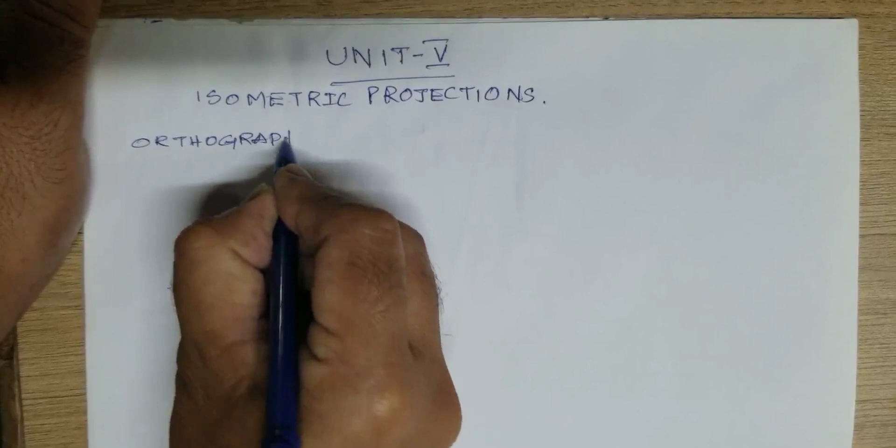But when you are drawing in orthographic way, I would like to explain orthographic. Let us say I am drawing that cube in orthographic way. Just see what this is. So when you are seeing this cube from the front, how are we going to draw it? We have some idea about orthographic projections. First of all, we have to draw the XY line. Then the front view you have to draw. When you are seeing from the front, how is it visible? As a square. This is a square that is visible.

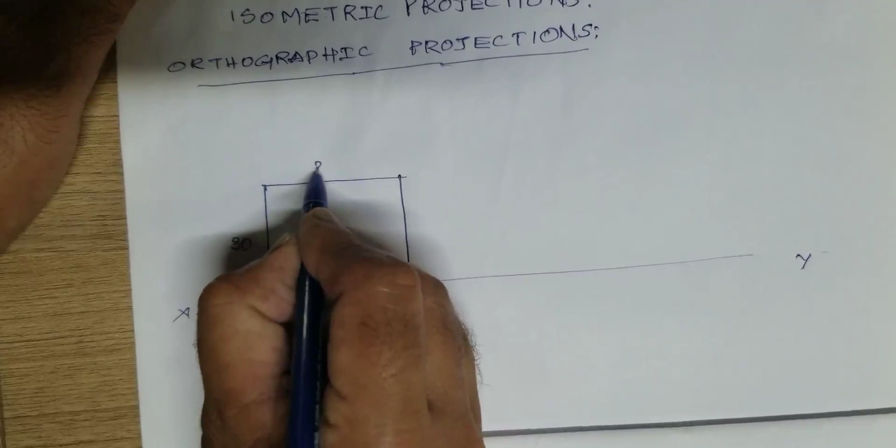So whatever the dimension may be, I am saying a small cube, let us say 30 mm dimension, here also 30, here also 30, here also 30, like that. That is when you are seeing from the front. Let us say we are seeing from the top, how it is visible. When you are seeing from top, it is visible as once again one more square here. This is the front view, this is called the top view. But what about the side view?

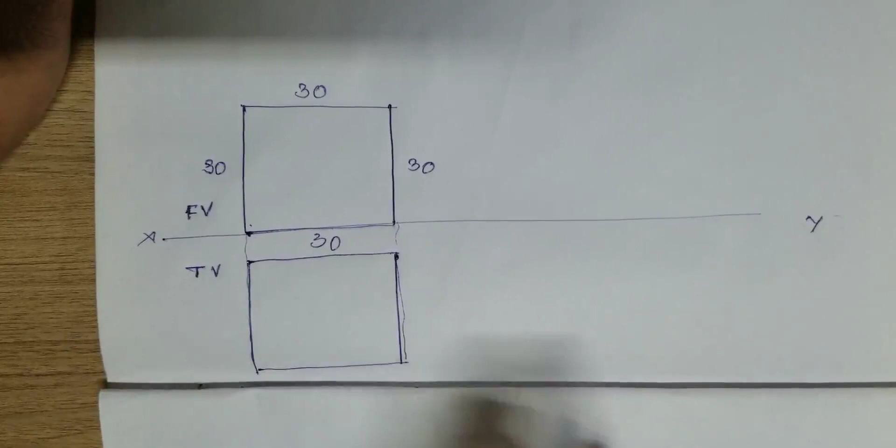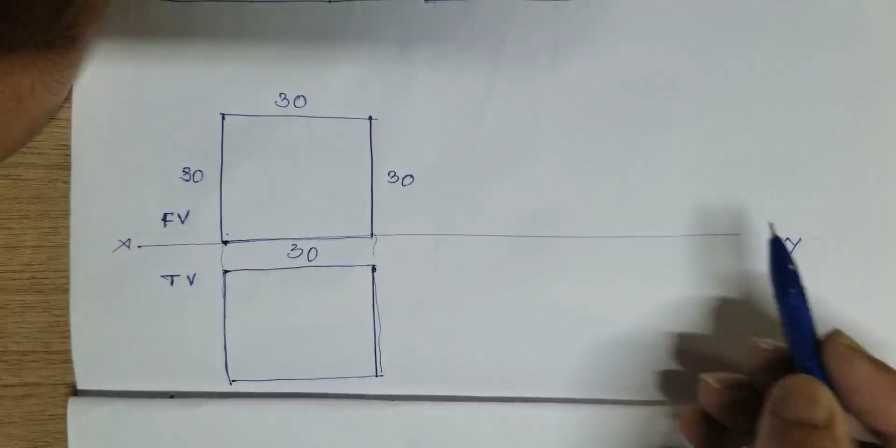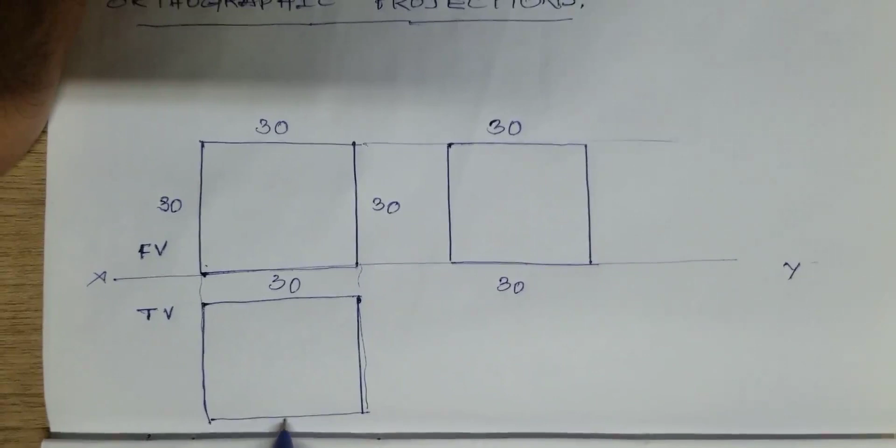Side view, either we can use left hand side or right hand side. No problem, we can use both sometimes. At least one we can draw, because the cube is symmetrical on either side, left side and right side. I am taking left side, so we have to draw it to the right side of the front view. So this is once again one more square of the same dimension, 30, because cube means all 6 sides are equal. It is also 30, 30, and here also 30, 30. Right? This is front view, top view, and side view.

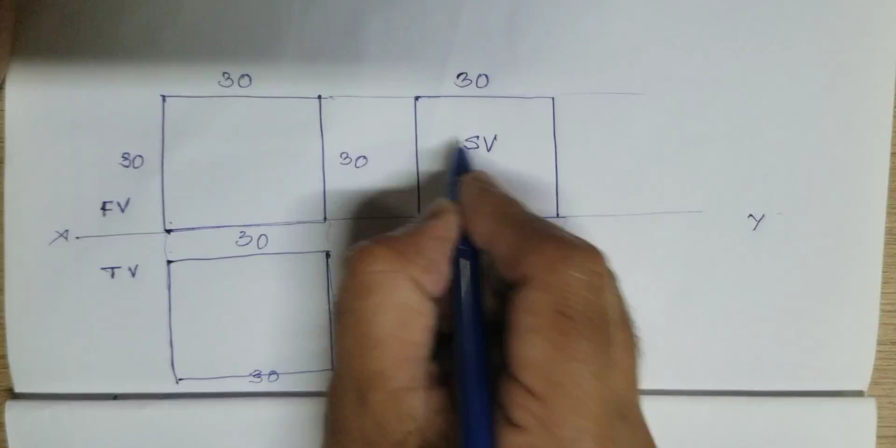Here we are saying it is left hand side view. If you wanted to draw the right hand side view, we have to draw it on the left side of this front view. So no problem. This is how we are going to do it. This is the cube actually. You can understand a little bit by seeing this front view, top view, side view, that it seems to be a cube.

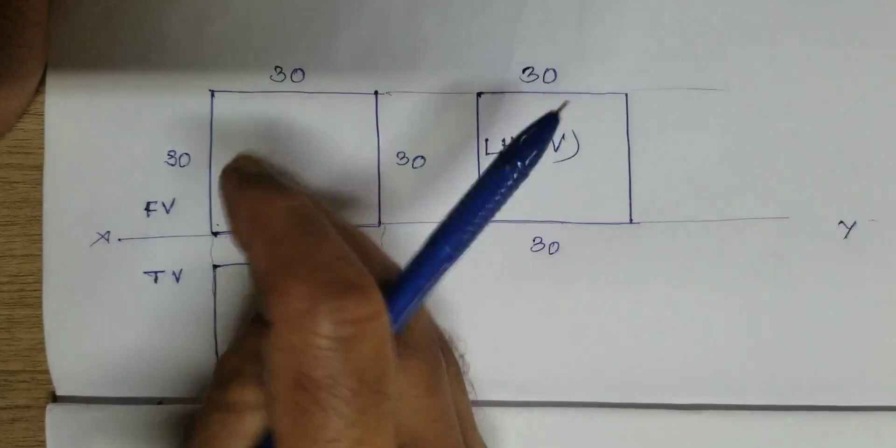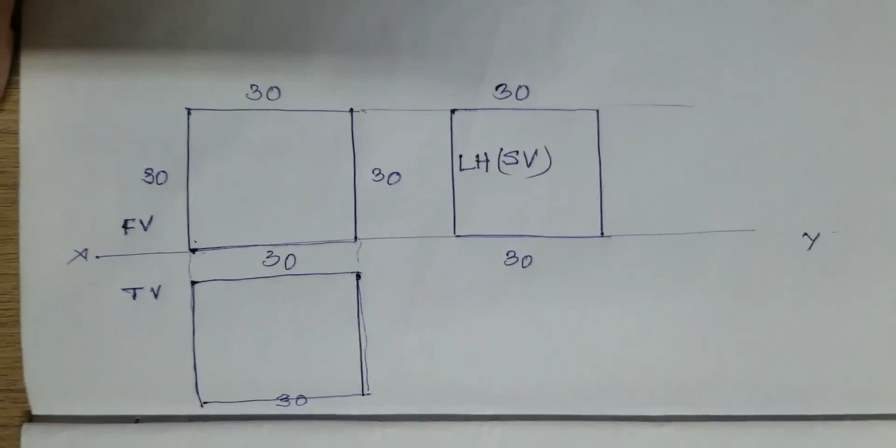Let us say some kind of rectangular object, cuboid, or cones, some other different kind of solids. Can you imagine that it is a cube? We can't. Only when we are having some kind of drawing knowledge can we say it is a cube. Otherwise, we are unable to say it is a cube. So the other way of projection, what we are discussing, is isometric projection. This is orthographic projection. That's why we are learning isometric projection.

This one, how do we have to do it? We have to do it like you see here. I am writing here isometric cube. It is the XY line. So one side we have to take on a 30-degree line.

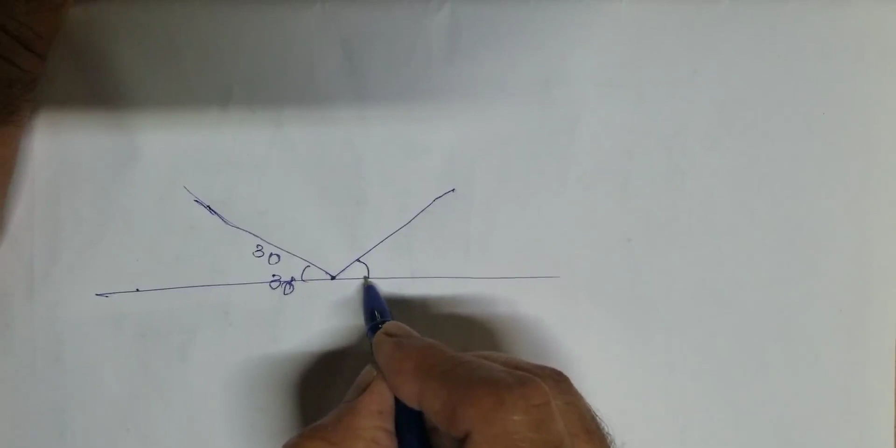The other side we have to take on a 30-degree line. So here we are going to have 30 on the 30-degree line, because one side we are taking on a 30-degree line and the other side we are taking on a 30-degree line, and this length is also 30. So the vertical we have to take like this. See, we are getting 3 directions. Let us say we can write O to X direction, then O to Y direction, O to Z direction. So with 3 axes we can try to draw the cube.

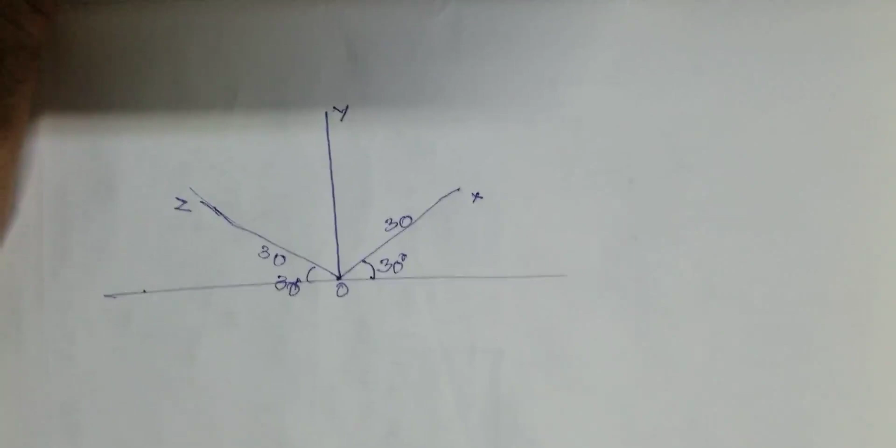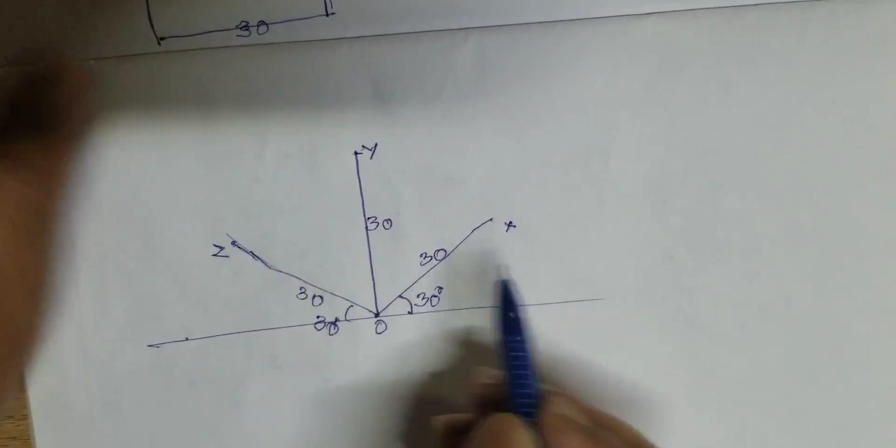See here, we are going to draw it, it is 30, vertical. The same 30 which is parallel to this line, from this point we have to draw it by keeping your mini drafter here and draw here, like this. What is this length? Same thing, whatever the 30 is there, take the same 30 here. So it is 30. Here also take the extension line for this, parallel to this line. Keep your mini drafter here and keep it over here. Draw the line. This length is also 30, like this.

Now draw the parallel line for this line. Keep your mini drafter here. Keep it over here. Draw the line which is parallel to this. So it is also 30, because we are getting the same length. Here also draw the parallel line for this line. From here, draw the line.

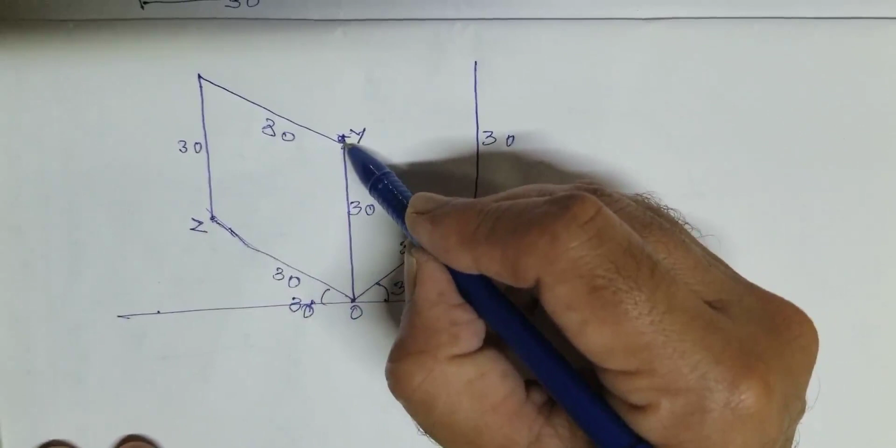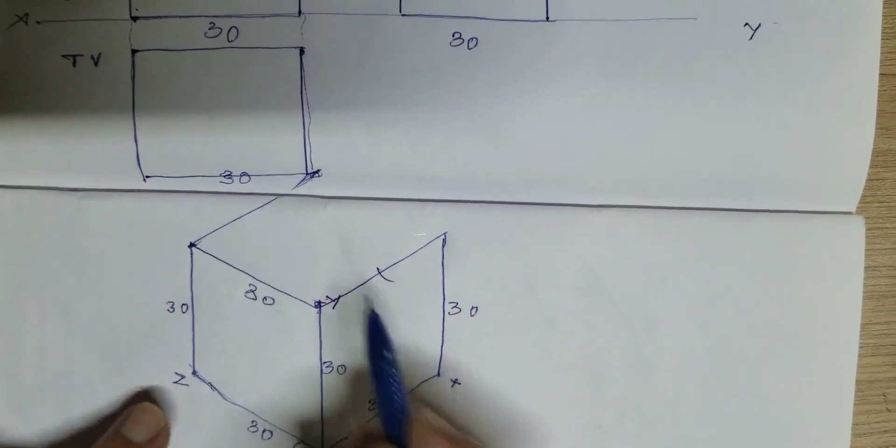Right? Now, from here, draw the parallel line for this line. Keep your mini drafter here. Keep it over here. Like this, it is coming over here. Draw the line. This length is also equivalent to this length. No problem, it is 30 only we are getting. From here, we know this point and this point. Draw these lines.

So, you just see this object. Once again, I am making it dark. This is looking like a cube. All 6 sides are equal. So we know this is one side, second side, right? Third side, which will be the back side here. Actually, this is the back side we are getting. Fourth side, then fifth and the bottom sixth side. So when you are representing it like this, we can understand it is a cube.

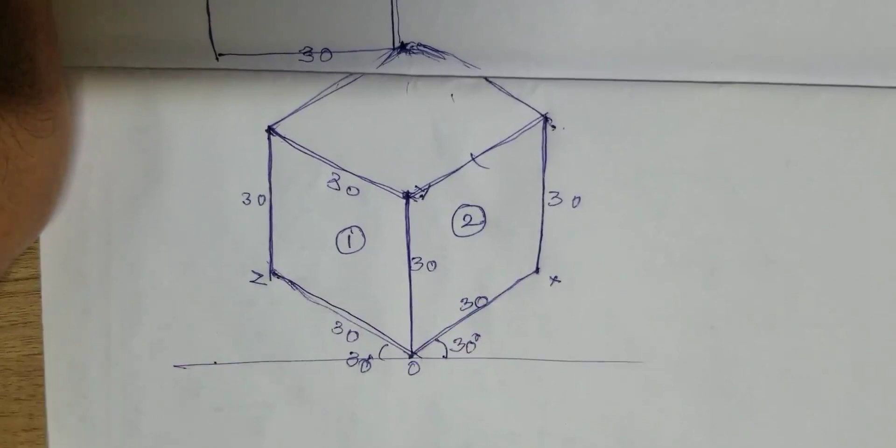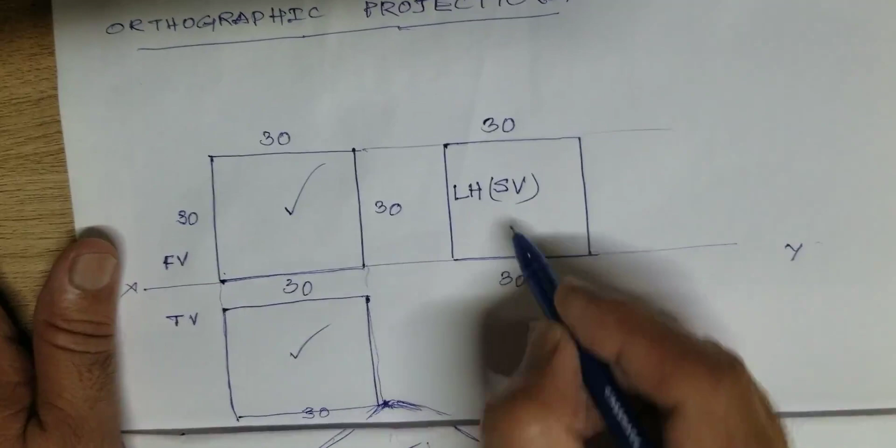Let us say we are seeing from this side. I am drawing the arrow. That means we are focusing from this side. So this square is visible like this. This top view is visible like this. This side view is visible like this. This kind of projection is called orthographic projection.

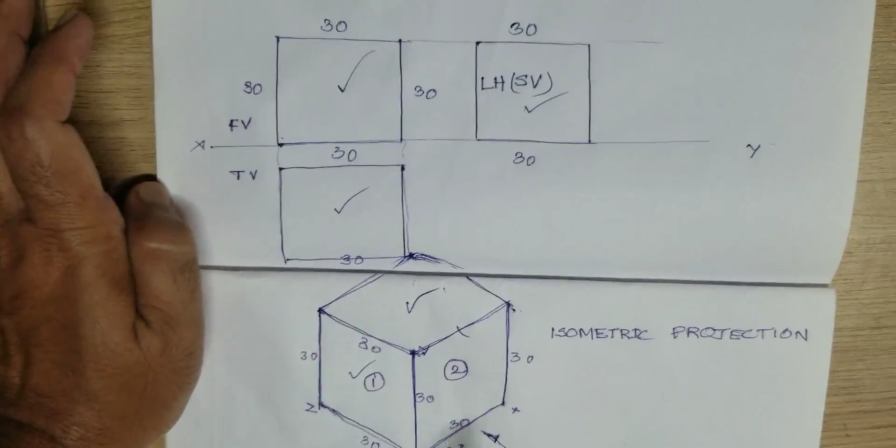See, the advantage of isometric projection is the cube is represented like this. The same cube is also represented like this. You just see, an ordinary person is also able to understand this is a cube. But this they are unable to understand, because unless they have drawing knowledge, they are unable to identify it is a cube. But here they can identify it. That's why it makes the difference as compared to this. So how do we have to draw it? Why do we have to take it like this? I would like to explain a little bit further.

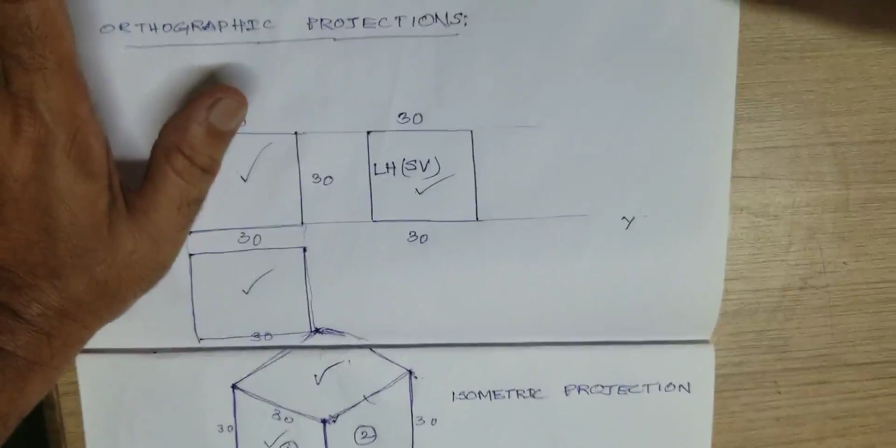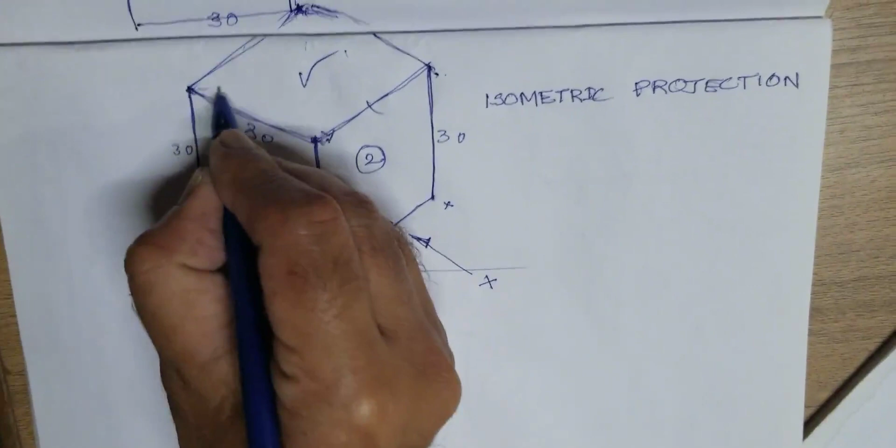So here what I would like to say is, if you are seeing the cube, see here, this is 30 degrees, no? Actually see what the angle between two lines is here. This is the line, this is one more line. The angle here is 90 degrees. The angle between this plane and this plane is also 90 degrees. Just come over here. The angle between these two is 90 degrees, but it is not 90 degrees here when we are drawing in isometric projection.

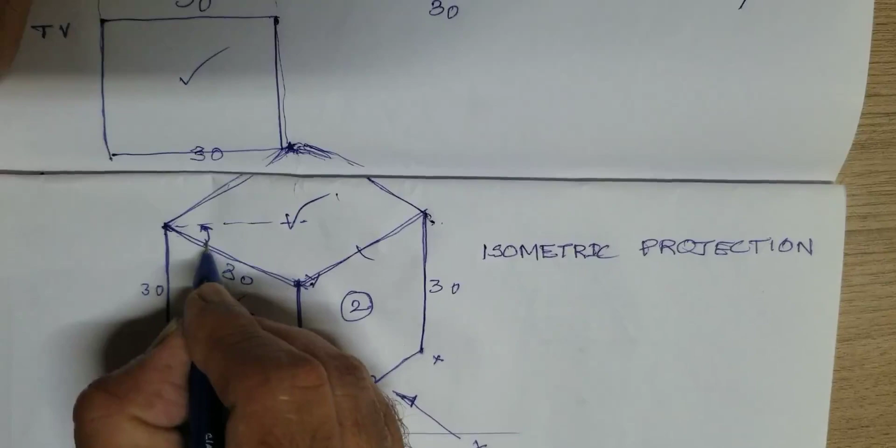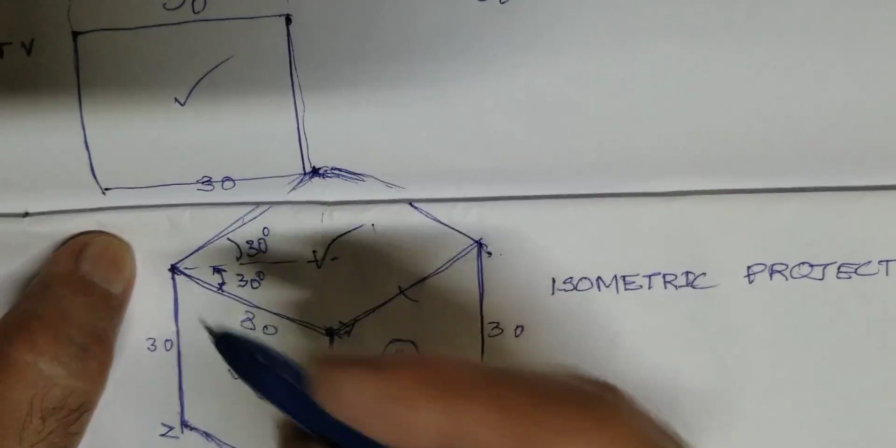Here, how much are we drawing? As we are taking 30 degrees, we are drawing all parallel lines. We are getting a 30-degree line over here. This is also 30. But what should it be? Here we are getting only 60 degrees, but we are missing 90 degrees. I am doing a small analysis of that 90. See here, this half line is 45 degrees. When the entire angle is 90 degrees, the half itself is 45.

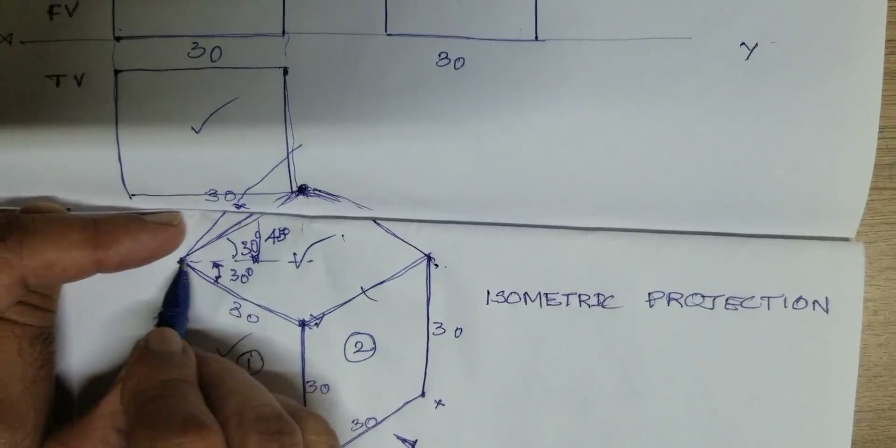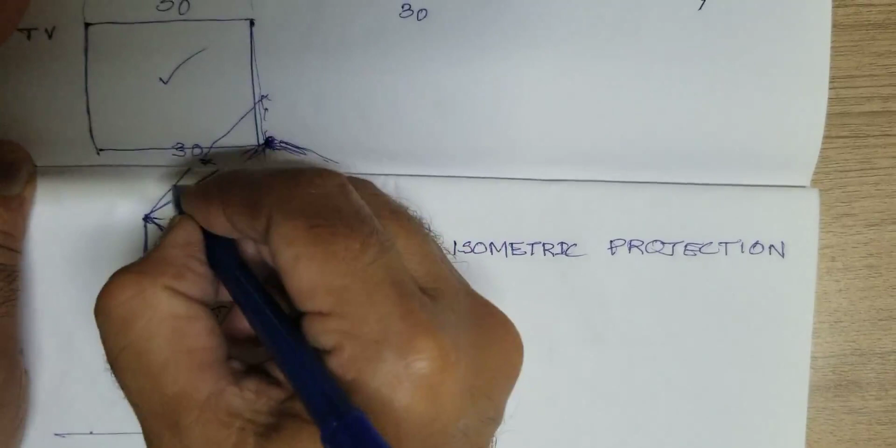So I am drawing a little extension like this. See here, this line I am drawing here. This angle, how much is it? Tell me. 45, because I am taking the true angle. Here also we can take 45 degrees. Here also it is 45 degrees. I am extending the line like this till the middle point. Just understand this. This is the 45-degree line. Actually we can say it is the true line, true length, or otherwise it is called isometric length.

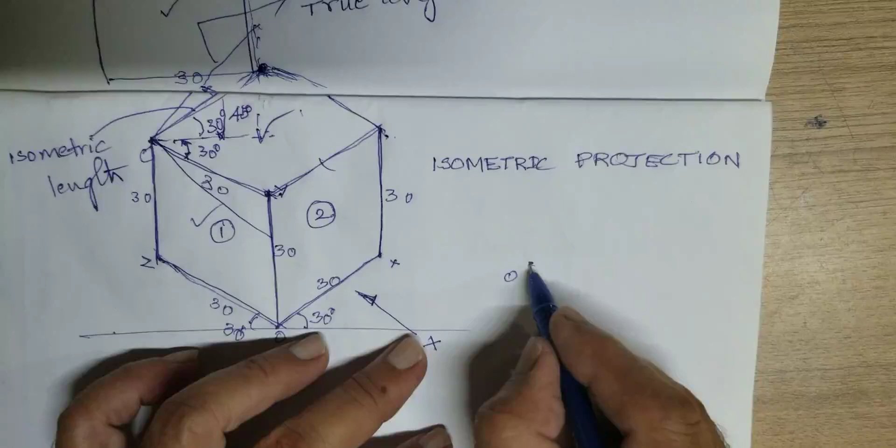Now I am magnifying this entire diagram aside. See here, this horizontal line I am writing here. Let us say it is O point. This is O I am writing. Forget about the distance. Now I am writing the 30-degree line. This 30-degree line I am writing.

How much distance we have to take? 30 mm we are taking, for example. Then we are taking one more line which is the real or true line, making a 45-degree line like this. This is the 45-degree line. All this I am doing to make some kind of analysis.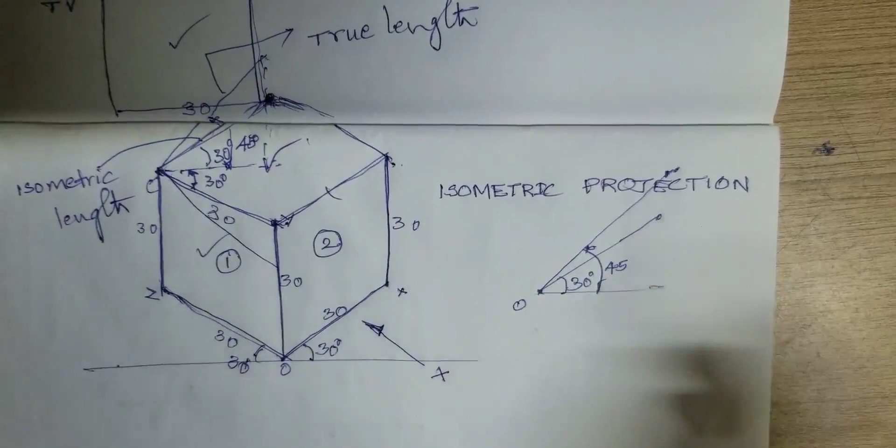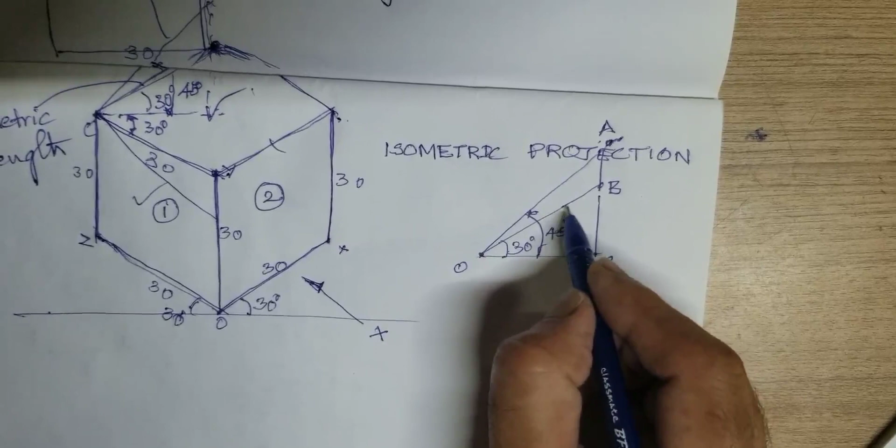See here. Now I am drawing the line as I am showing here. This point I am marking as A, this point as B, this point as C. I would like to make an analysis on this. What analysis? We know it is isometric length. Iso length I am writing. It is a true length.

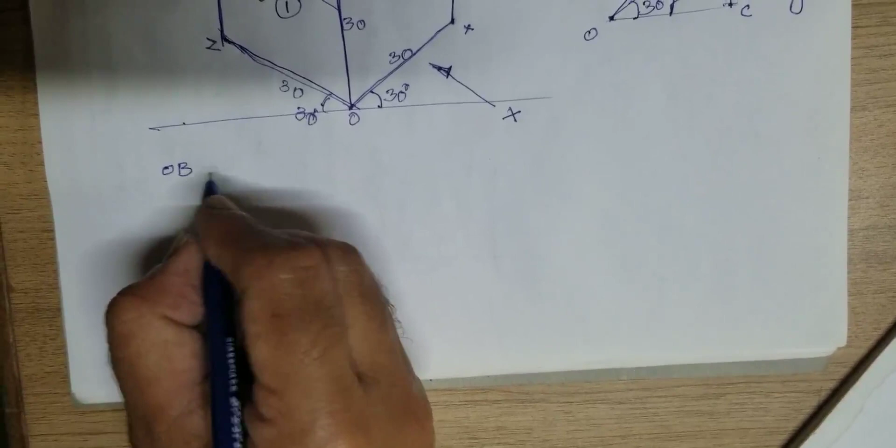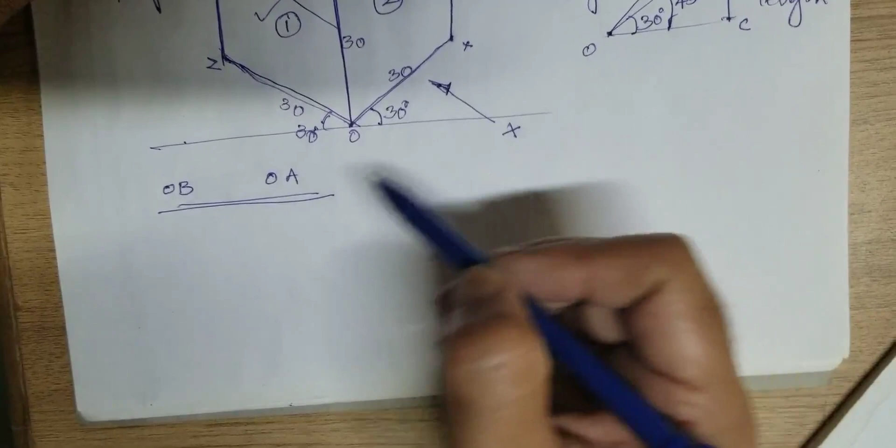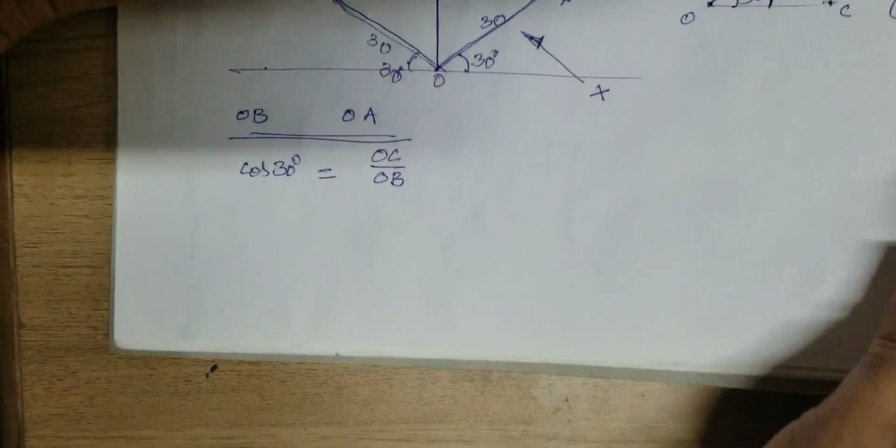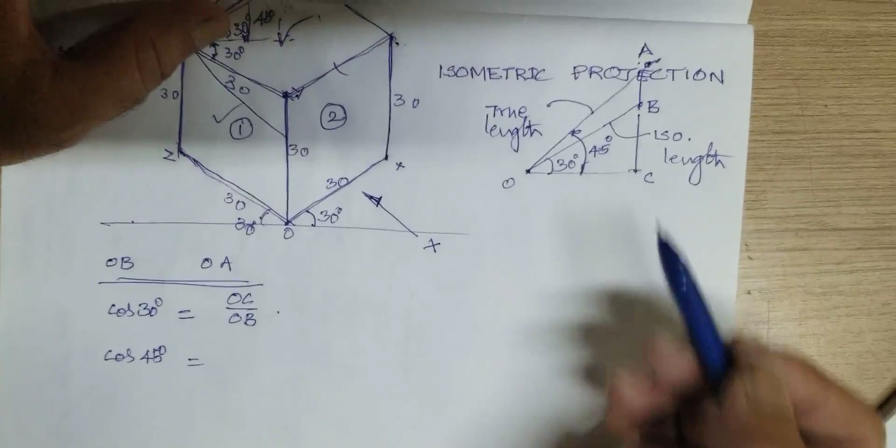So here I am taking cos 30. What is cos 30? In the right angle triangle OCB, cos 30 is equivalent to OC by OB. Then you can take cos 45 here. What is cos 45 in the bigger triangle OCA? OC by OA.

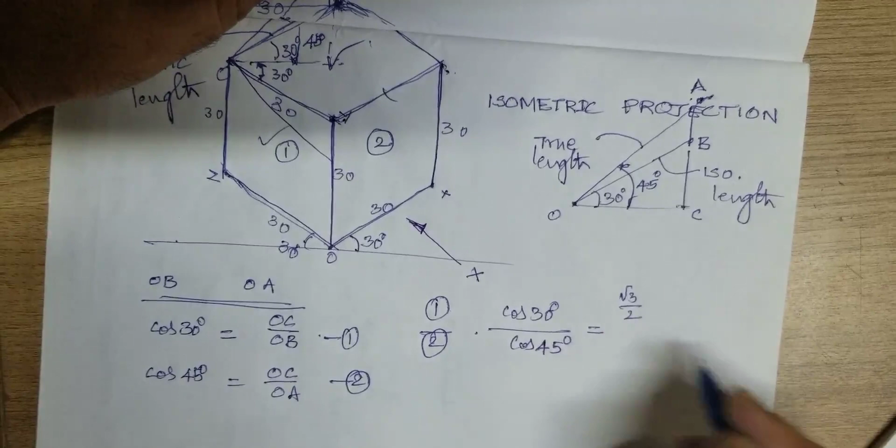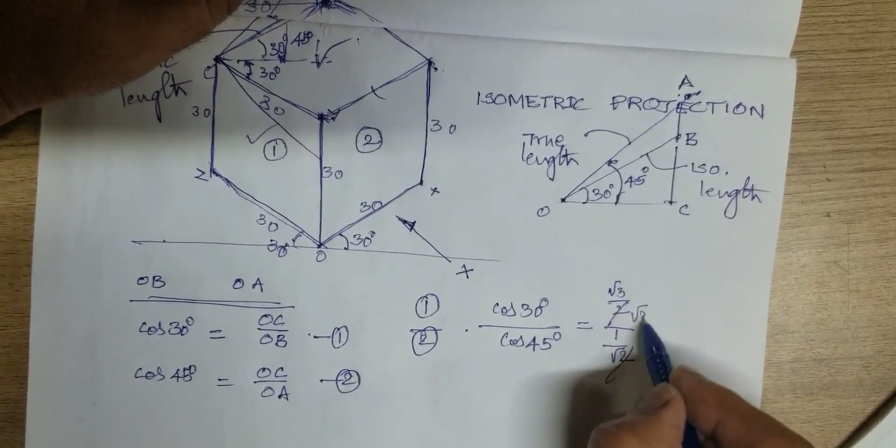Now we do this analysis. Let us say this is equation one and equation two. Dividing 1 by 2, we get cos 30 by cos 45. Cos 30 is root 3 by 2. Cos 45 is 1 by root 2. Just simplify it, and we get root of 3 by 2.

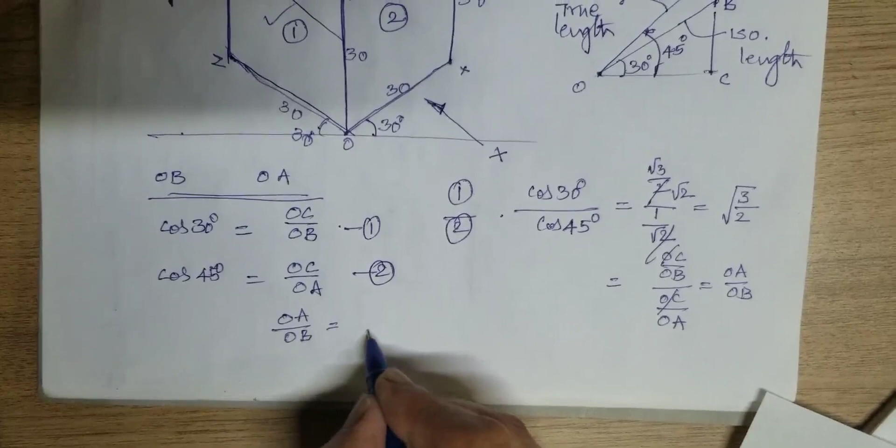On the other side, cos 30 by cos 45 is OC by OB divided by OC by OA. OC gets cancelled, so here we are getting OA by OB. So OA by OB is equivalent to root of 3 by 2.

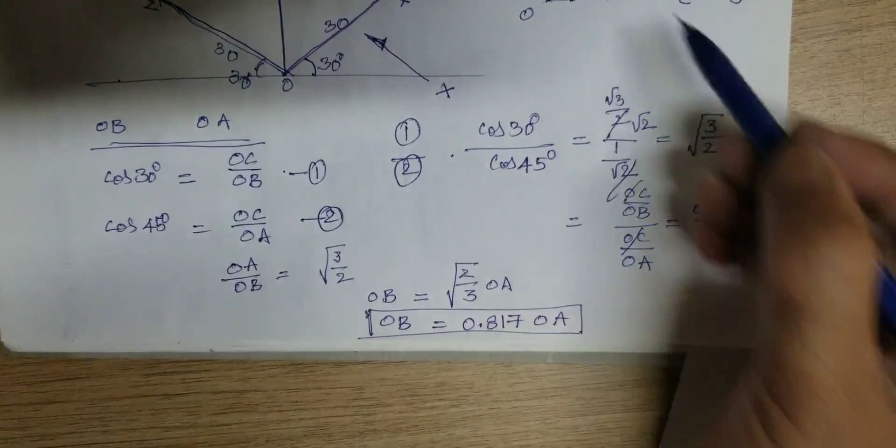So OB is equivalent to root of 2 by 3 times OA. Just calculate it, we get 0.817 OA. Here OB is the iso length, OA is the original length. That means the iso length is equivalent to 0.817 times the true length. That we have to understand.

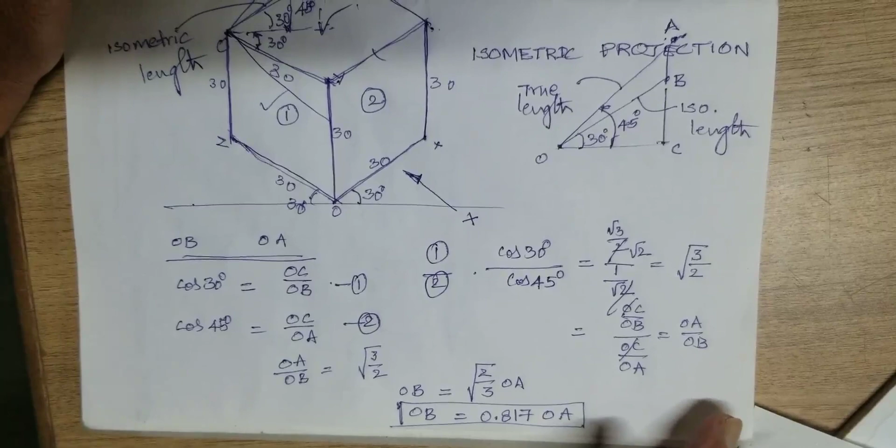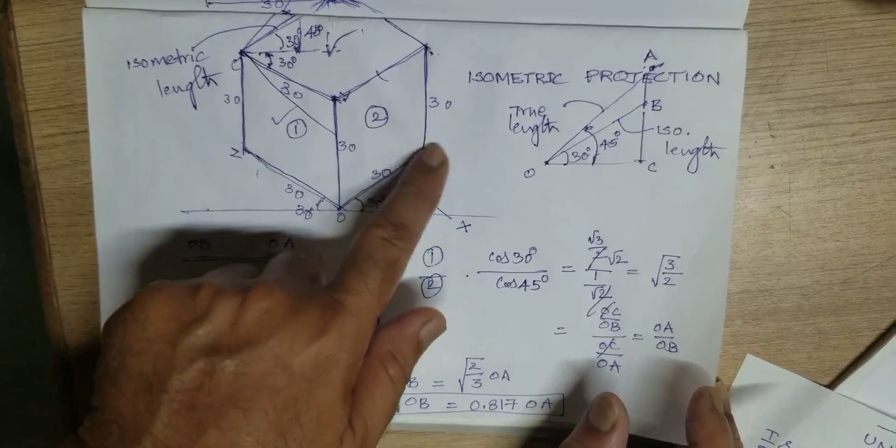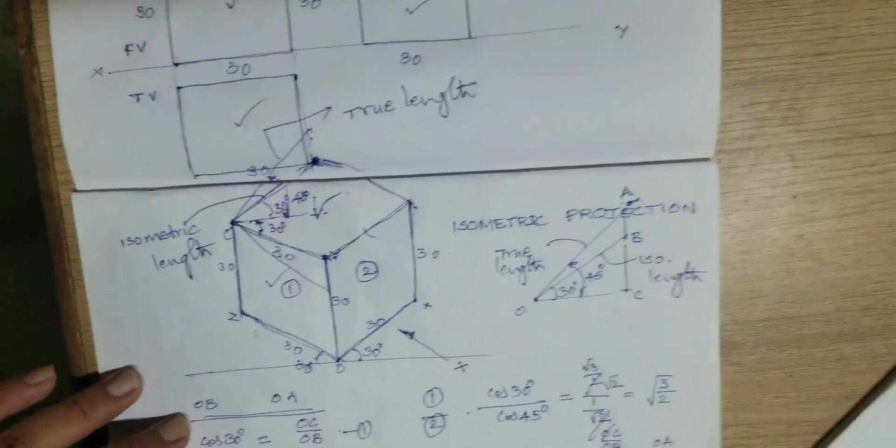They will ask what is the relation between isometric length and true length. When you are drawing these lines, actually you are supposed to take 0.817 times the true length given. But just observe it, I have not taken this. Actually, we have to take it like this. When we take this with these angles, this kind of projection is called isometric projection.

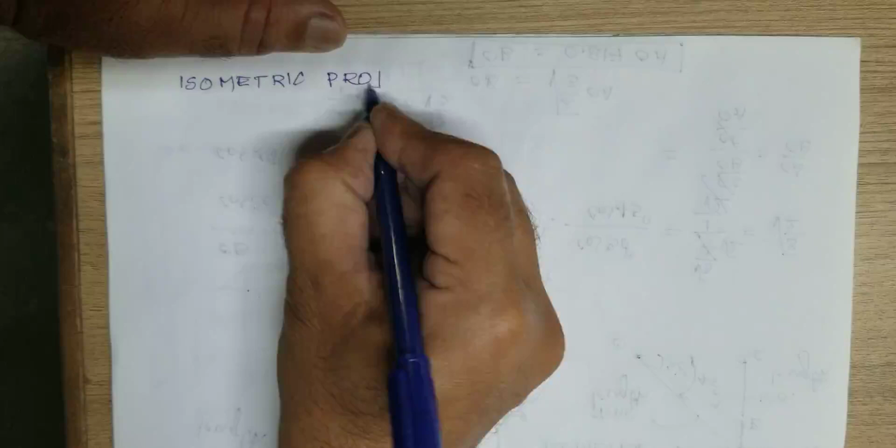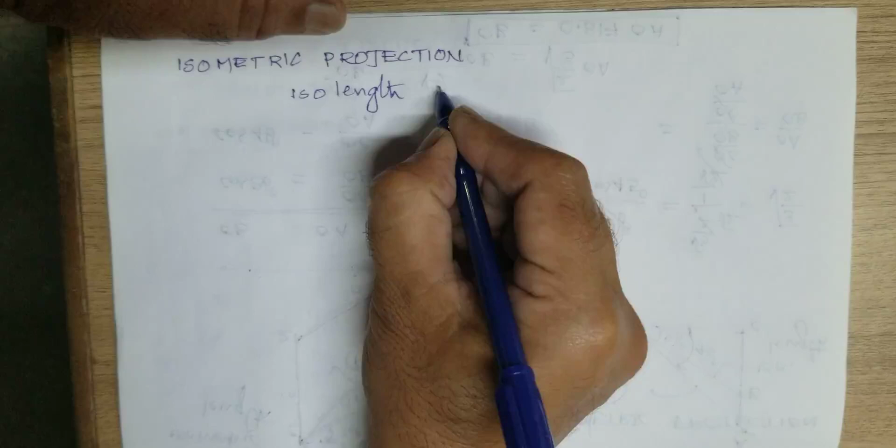So two things I would like to tell. One is isometric projection, where the iso length is equivalent to 0.817 times the true length.

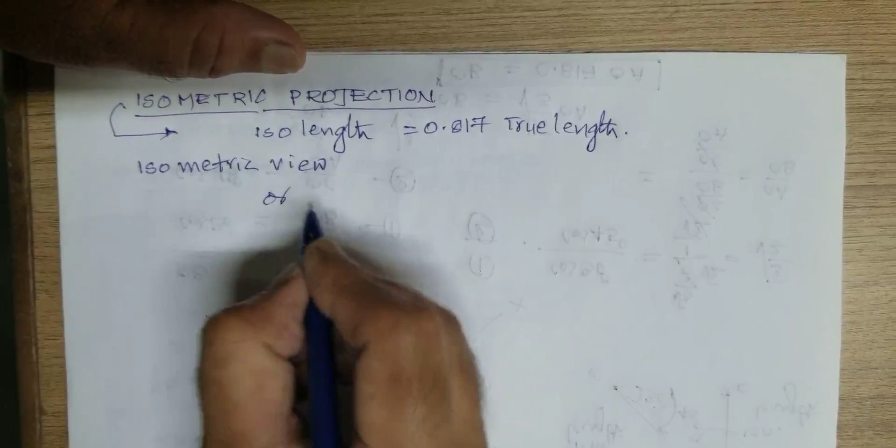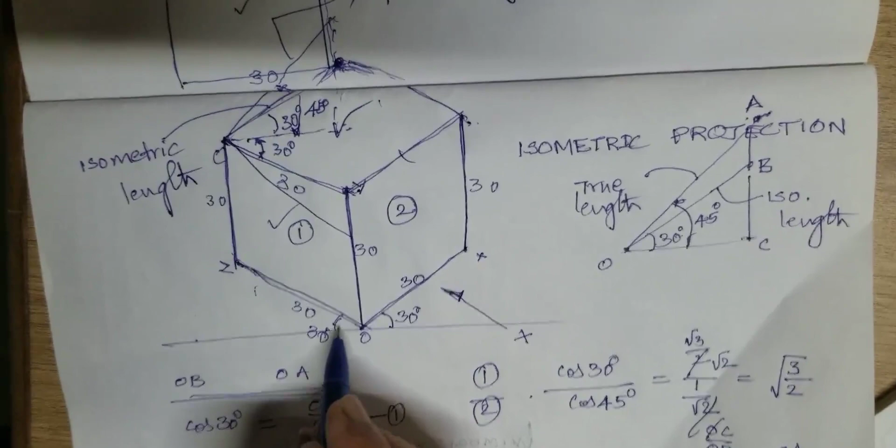Or for this, generally we are using like this. Sometimes we are using the word isometric view or isometric drawing. Please understand this. When the examiner or somebody else is asking for an isometric view or drawing, we are taking these angles: this side angle 30 degrees, this side angle 30 degrees, vertical only. But the same thing we have to take.

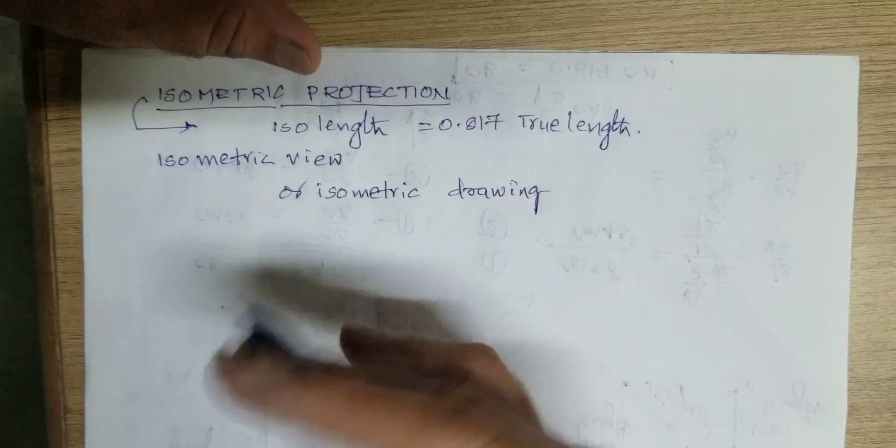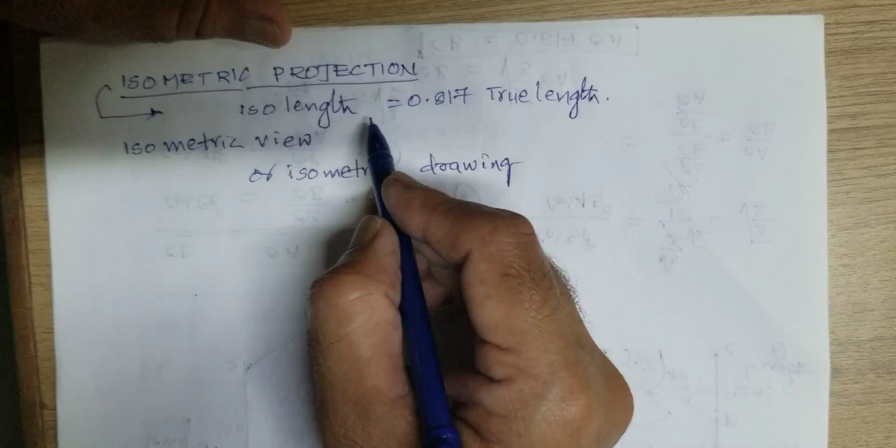When they are asking for isometric projection, the lengths we have to take as 0.817 times the true length. Let us say they are asking isometric projection for a 30 mm size cube. We do not take exactly 30 mm; we have to take 30 into 0.817 times the true length. That is the isometric length we get by multiplying by this factor. With that value only we have to draw it, but the angles are all the same.

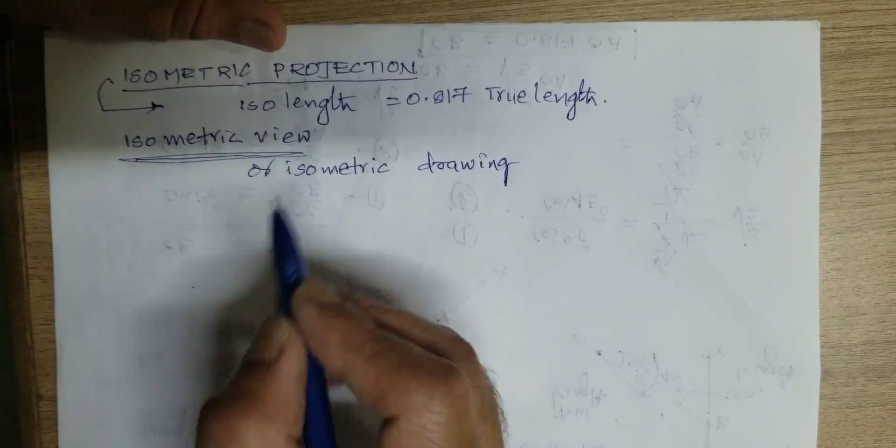But second, when we come to isometric view, all side angles are 30 degrees, vertical only, but we have to take the exact length. Let us say I am asking for an isometric view or drawing. We have to take 30 mm only here in isometric view and isometric drawing. Only in isometric projection is the iso length varying. That we have to remember.

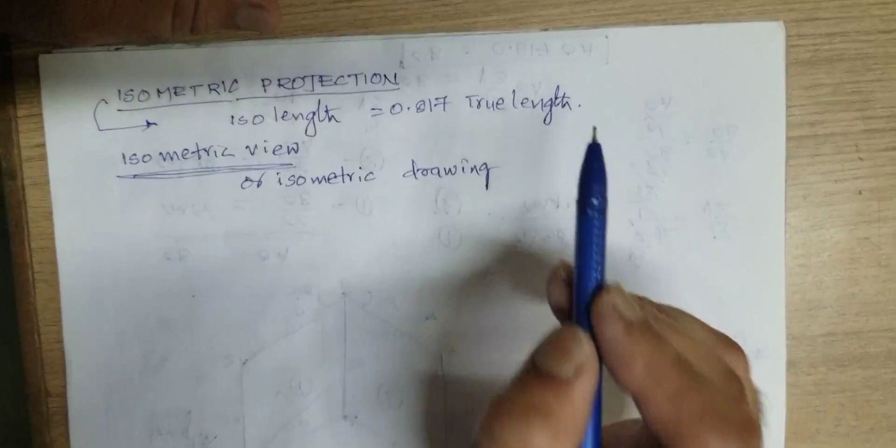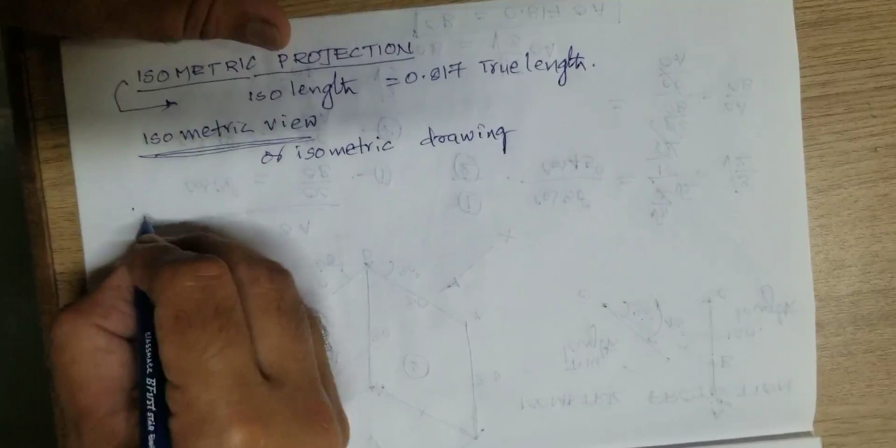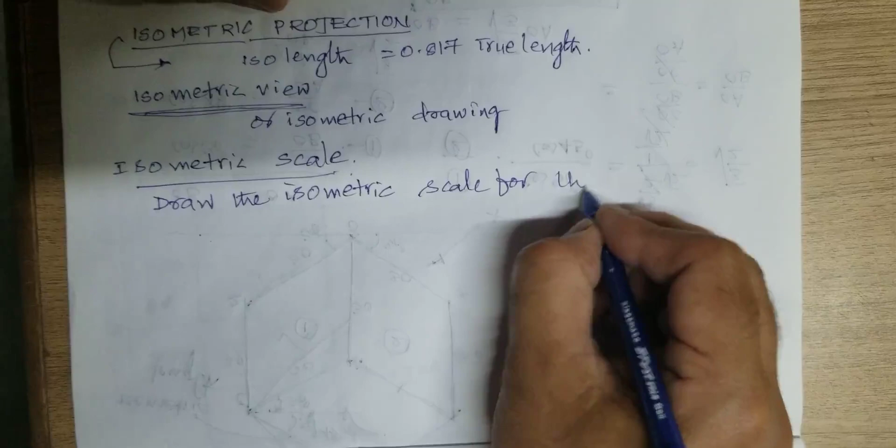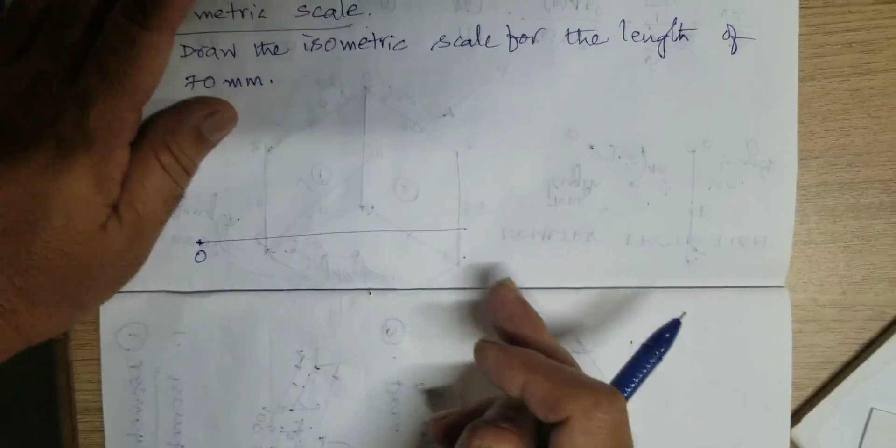Next, one more important question they generally ask is isometric scale. They are asking to draw the isometric scale. What is isometric scale? Let us say your question will be like this: draw the isometric scale for the length of 70 mm. So how do you have to do it? You draw with a 2H pencil, a very light pencil, like this. This is O, let us say. No relation to OA, OB, which we took in this cube. Forget about that. Here I am taking O, A, something like that.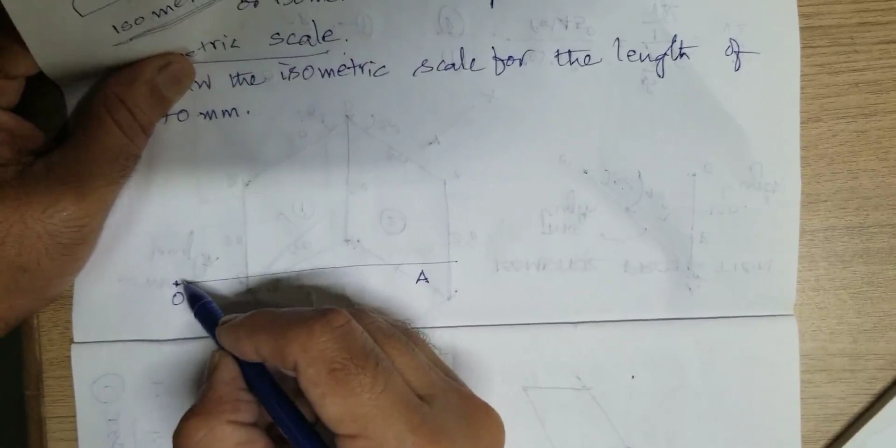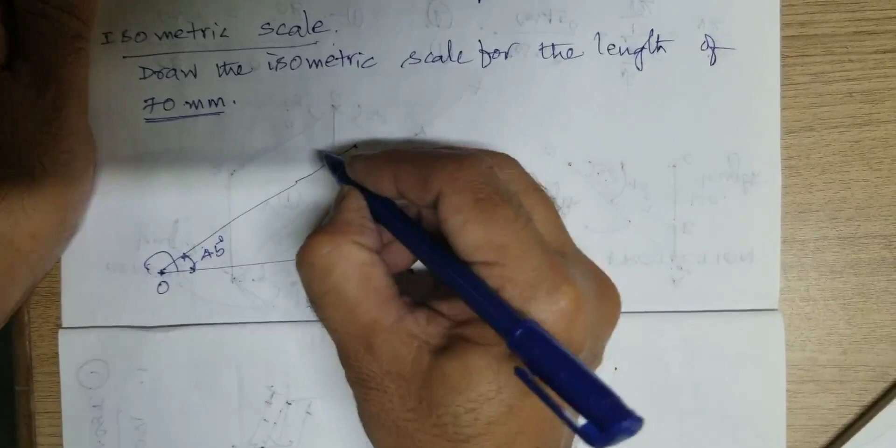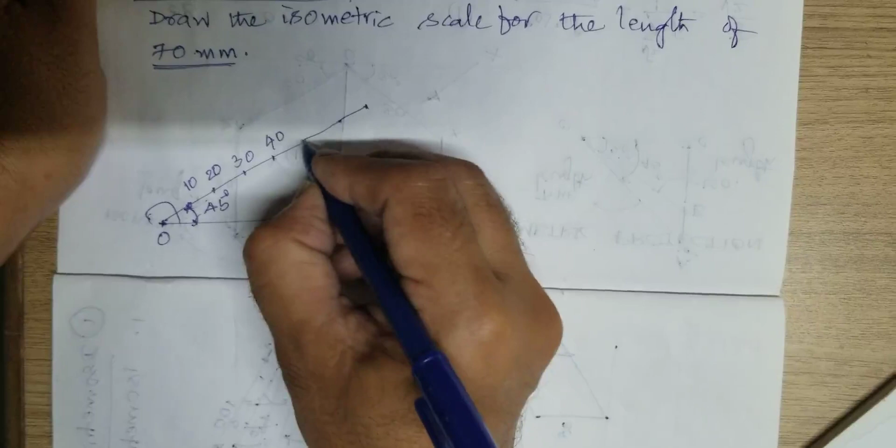Now we want the isometric length and the true length. Take the true length; we know the true length is on the 45 degree line. Draw the true length line by taking angle 45 degrees. Put your compass over here and take 45 degrees. So how much length do we have to take here? Because he is asking about 70 mm, measure 70 mm over here. It is 70 mm total length. Roughly I am marking 10 mm, 20 mm, 30 mm, 40 mm, 50 mm, 60 mm, 70 mm.

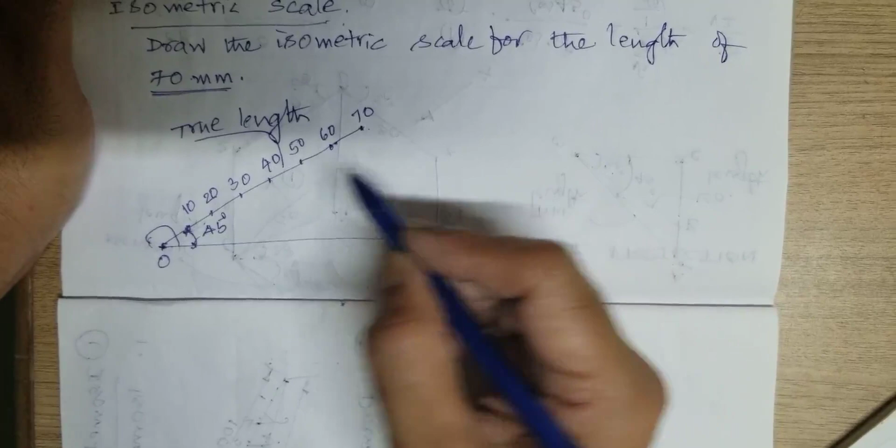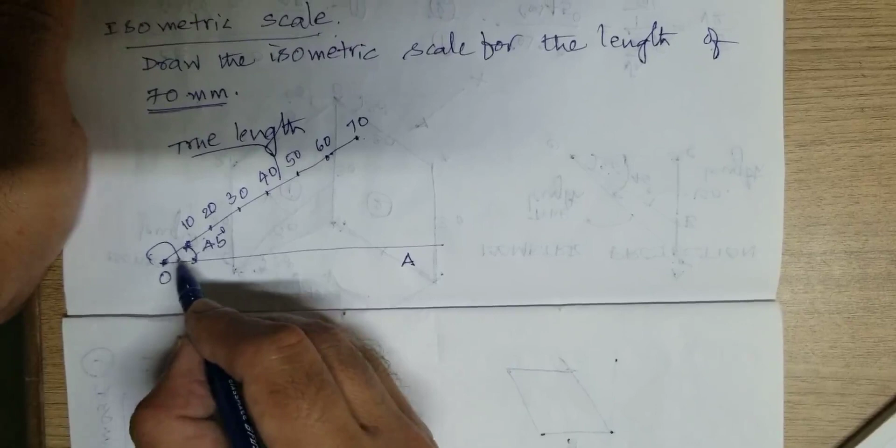Then we have to write it. It is actually the true length. Do all this with a 2H pencil, because these are construction lines. But this is a measurable length: 70 mm, 100 mm, whatever it is. Here it asks 70 mm, so I am taking 70 mm. It is the true length. Then the isometric line, how do we write it? True length on the 45 degree line, iso length on the 30 degree line. Draw the 30 degree line with the compass from this point itself. This is the iso length. Just extend it.

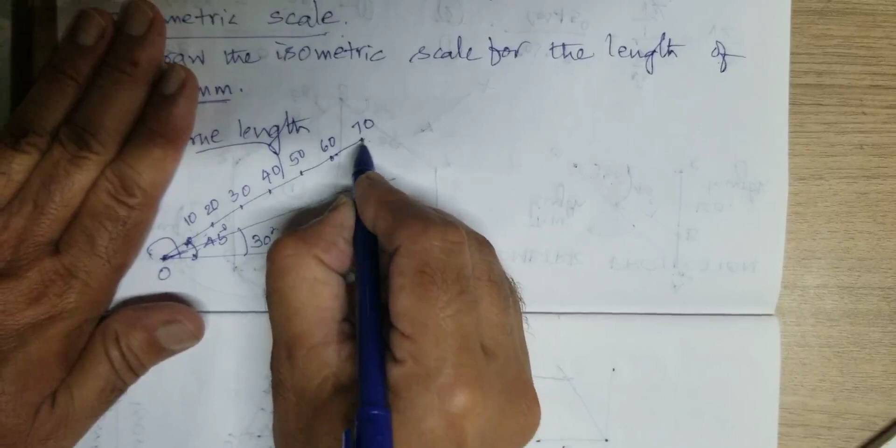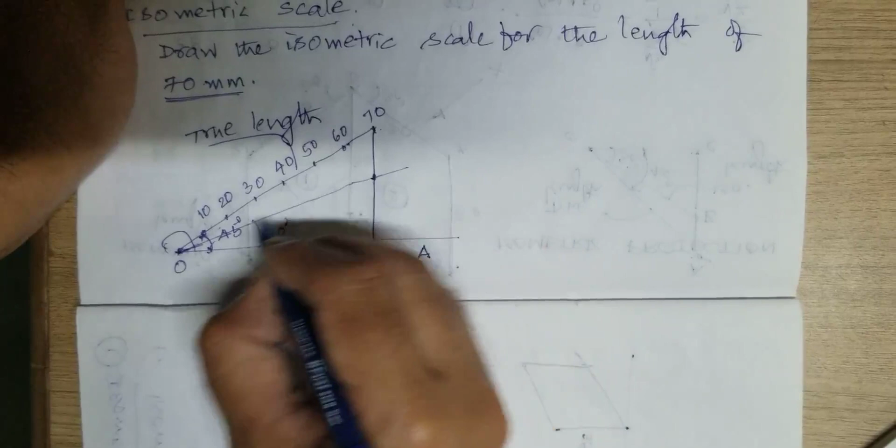Now draw the perpendicular to this OA line. Keep your mini drafter here like my hand, and draw from here. Write it. This is the representation of 70 on the isometric length. Whatever the length we have, it is 70. For this we have to take it. Write it.

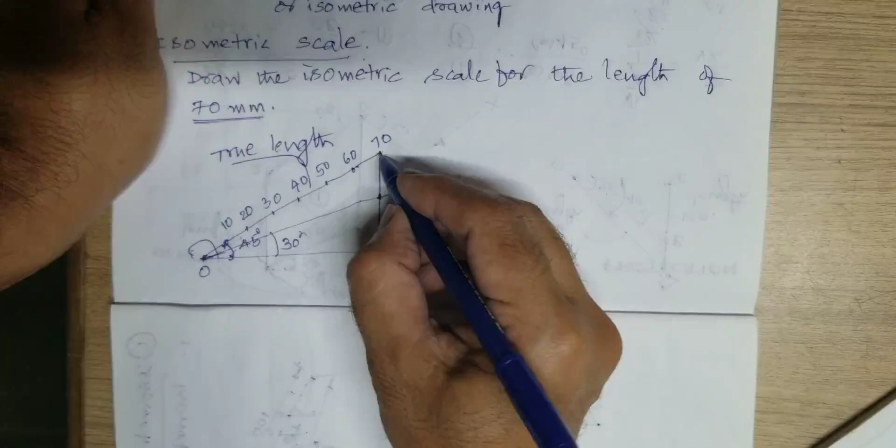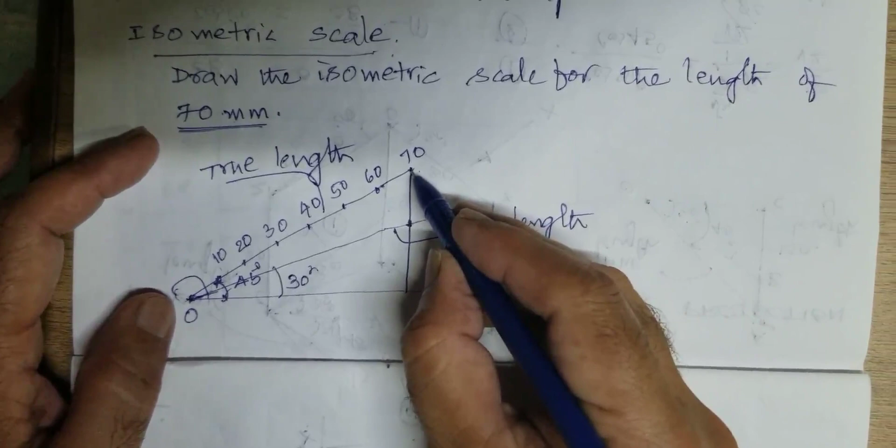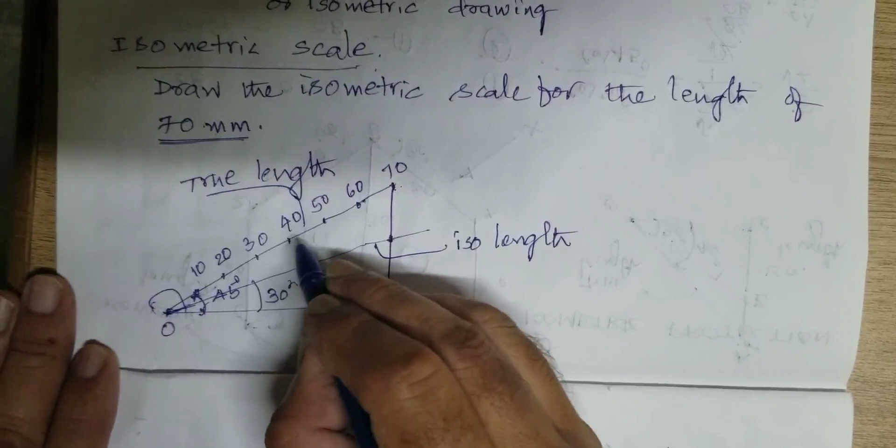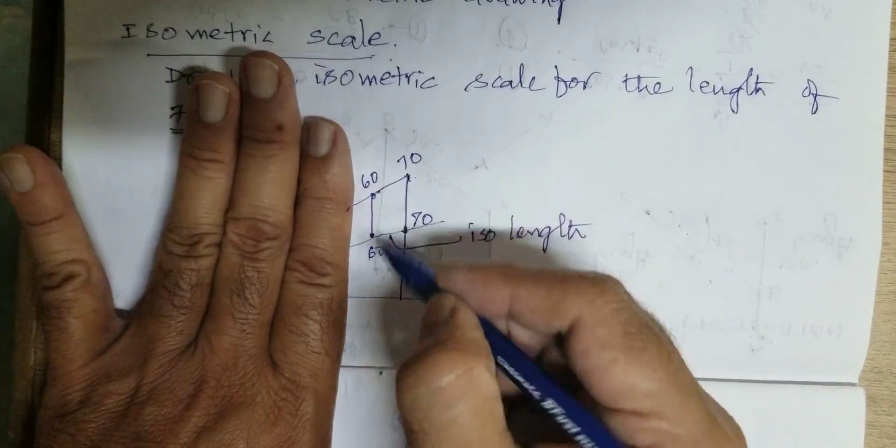Okay, after drawing this 70, draw one more line, the 30-degree line. It is called iso length. Here we draw this line perpendicular to the OA line to meet the iso line. Now we have to draw lines at 10 mm, 20 mm, 30 mm, 40 mm, 50 mm, 60 mm, parallel to this line, which also represents 70 on the iso line. This is 60. How can you draw parallel? Keep your mini drafter here, make the pivot tight, and draw parallel lines: 50, 40, 30, 20, 10 like that.

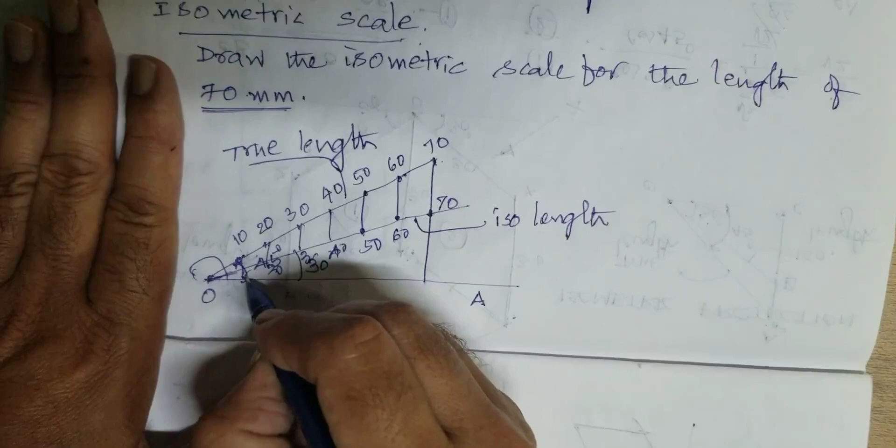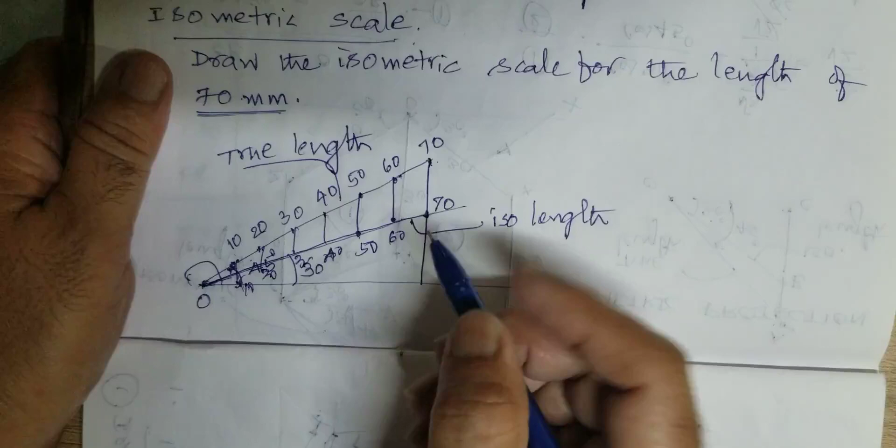See, this is iso length and this is true length. The true length represented here is 70, but it is the isometric scale. That is how we represent the isometric scale. Draw this line with an HB pencil, because only this line we want. Do the other lines with a 2H pencil. This is how we draw the isometric scale.